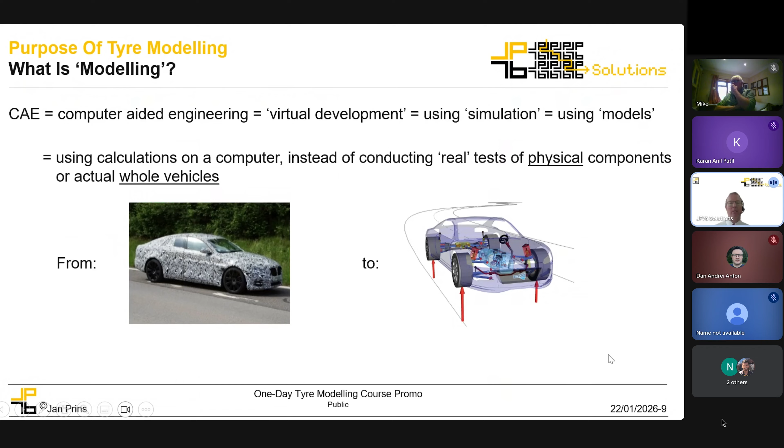We want to do that because physical tests are much more expensive. CAE is much cheaper. We will not need prototypes shipped all over the world. That costs a lot of money - you build a very expensive prototype and then you're sticking it in customs, on a plane for several days, stuck in a harbour somewhere. All those things are not ideal, and also physical testing is not particularly repeatable and reproducible, which CAE is.

If you want to do simulations of how vehicles behave dynamically, then of course tyres play a very important role in that. And if you want to do simulations of dynamic behavior, then of course you will need tyre models. They are then used to do development of vehicle dynamics attributes, durability, reliability or dependability as some people call it these days, and NVH - noise, vibration, and harshness.

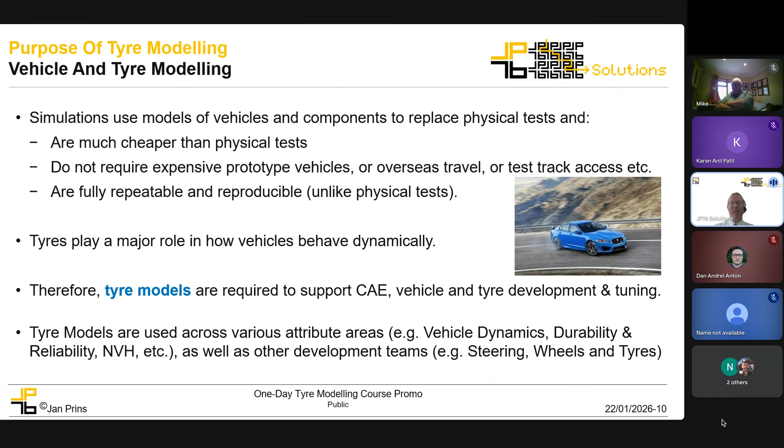And just more specialist areas such as the steering teams, the wheels and tyre teams, etc.

I'm not going to go into detail on this, but tyres do their stuff by virtue of friction, by virtue of grip between the tyre and the ground. There is no grip without slip, so you always have to generate a little bit of slip to generate the forces, either lateral or longitudinal, i.e. fore-aft or left to right. There'll be a lot more about that on the course, but even there we will barely be able to scratch the surface - pun intended - as it's a complicated topic, and there's a lot of research going on in this area, and you probably need several years to really dive into the depth of it.

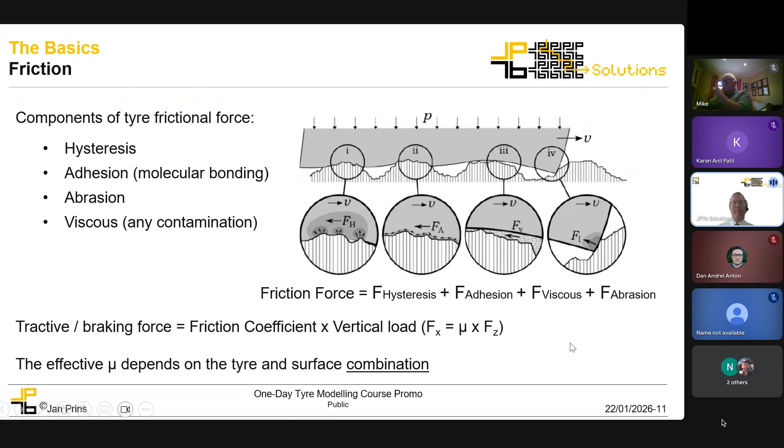My next slide is a bit more about introducing certain terminologies I already mentioned: lateral and longitudinal - longitudinal being fore-aft, lateral being side to side. But there's also terms such as camber, or inclination angle, so how much the wheel tilts, and slip angle, how much the tyre is pointing away from straight ahead. There'll be much more about this on the course, of course.

A friend of mine in the industry, Dr. Christian Bachmann from FKA in Germany, was recently quoted in Tyre Tech magazine, and he was saying: tyres combine mechanical complexity with highly non-linear behavior. I couldn't have said that better. Tyres are complicated, but it also makes them very interesting to work with.

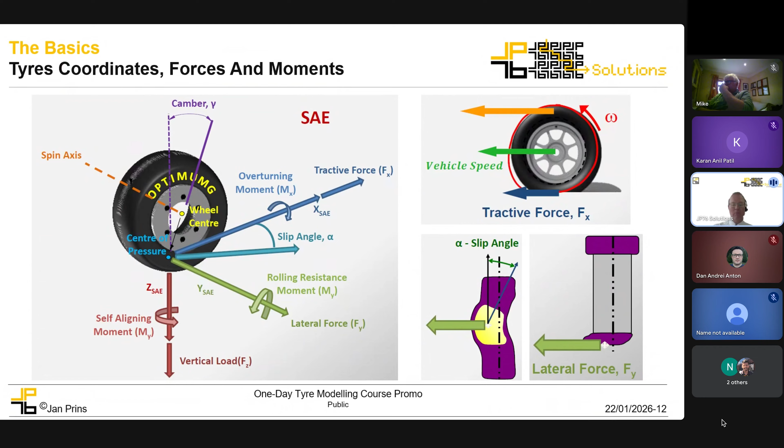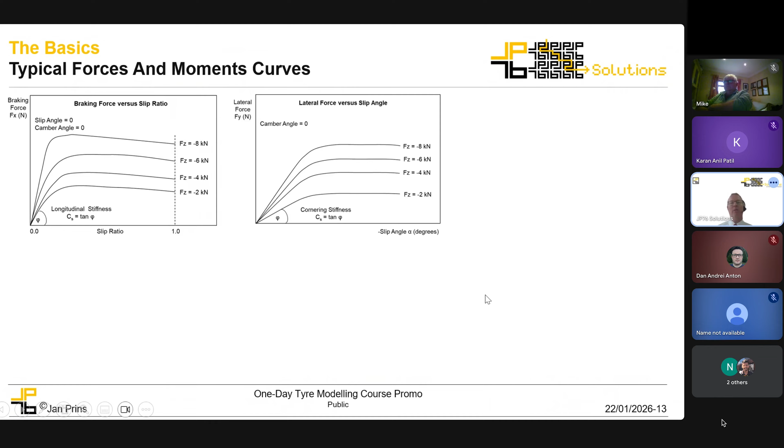Again, I'm not going to dwell on these various graphs, but these are typical graphs that you can produce if you test tyres and then plot the results that you get. These are typical ways of looking at the data you might gather for a particular tyre, or more often on several tyres, to compare those to each other. And tyre modeling is then about coming up with mathematical equations that, for the same input conditions as you had on your rig, produce the same forces and moments as you measured on the rig.

That's probably the shortest I can put the principles of tyre modeling. For magic formula models, which we will talk about a lot more on the course as well, the magic about that particular tyre model is that someone came up with some equations and they magically match the shapes of these various curves that you typically measure on a tyre.

For other models, the principle is still the same, but those types of models, such as FTire and CDTire, are models with physical properties such as stiffness, damping, grip, etc. But again, the principle is the same: you have a model, you give it the same conditions as in your measurements, your model then predicts some outputs, and you compare those with what you've measured, and you keep tweaking the parameters in your model until it matches what you've measured as closely as you can get it. Depending on what model you have, that can take a matter of hours, days, or even weeks.

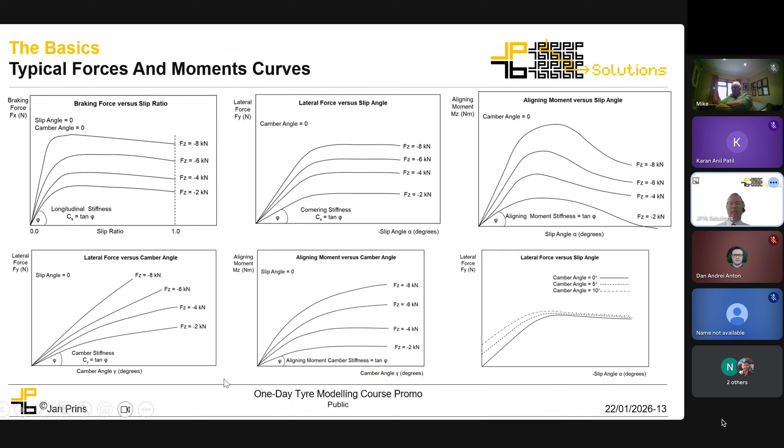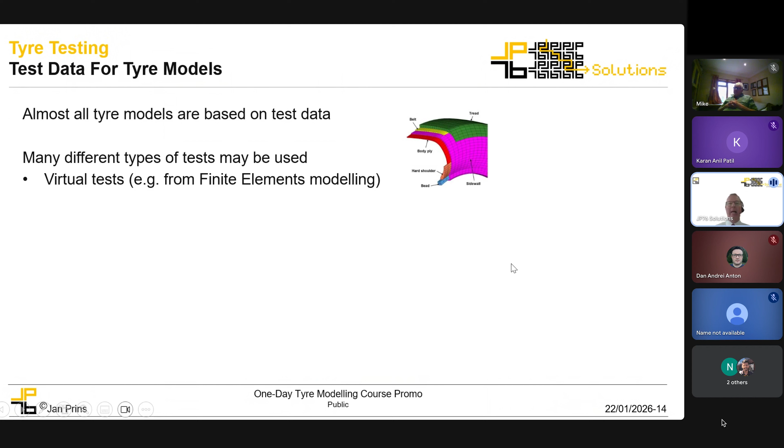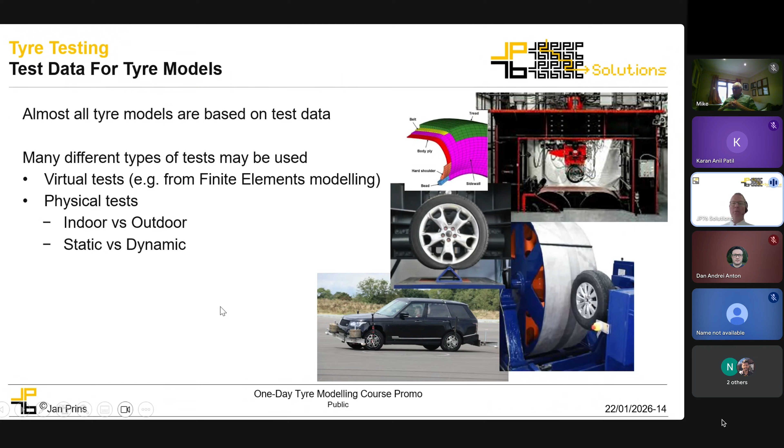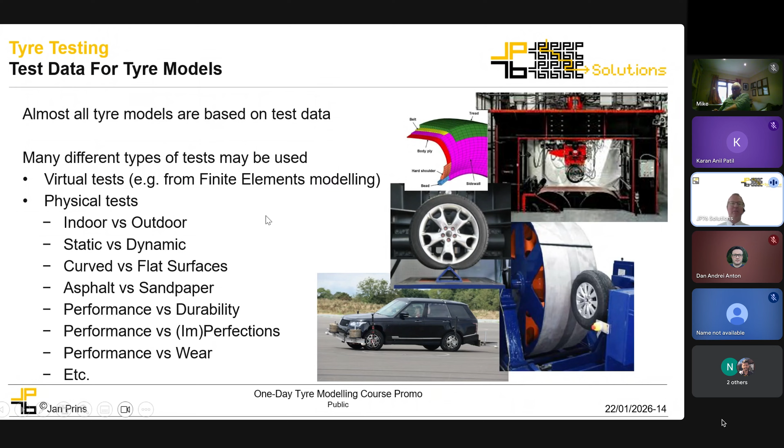So a static tyre is literally what it is. It's not rotating, it's just pushed down or pushed sideways or steered. You can have curved surfaces or flat surfaces. You can be looking at lots of different aspects of the tyre with regards to performance, durability, or performance versus any tyre imperfections, or how a tyre wears, etc.

But typically, empirical models would be looking at something like magic formula. Physical models would be looking at things like FTire and CDTire. And for FE models, we'll be looking at Abaqus or similar types of FE models for tyres. We would not normally use those in the sort of dynamic simulations, dynamic work that we typically are talking about here.

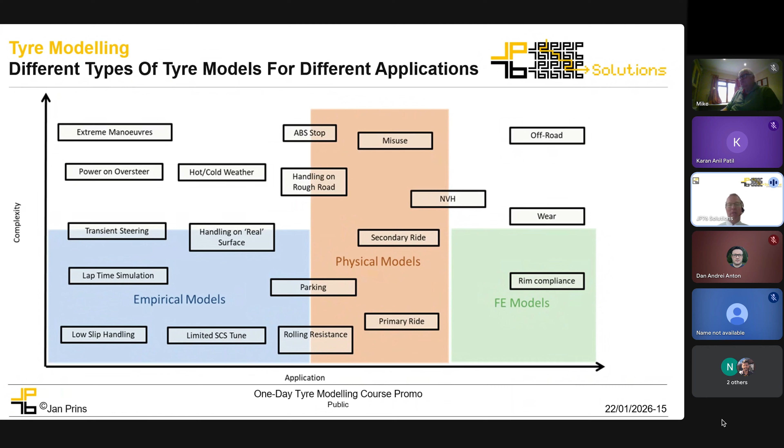So again, I put this on LinkedIn to try and prompt a bit of debate and get people's attention, basically. But the current process, as I've just described it, is very much: you make a tyre, you test it, you get some data, you create a model, and then you can do your simulations. But that's not ideal, because you'll already be making a tyre, which costs money and time, and it might not be the tyre that you need.

So really, the design process is creating a model first of a tyre. You have to, of course, be confident that you can make that tyre. But if that is the case, then really you want to do your selection of how the tyre should work and what it should do and how it should behave and everything else iteratively in CAE by using simulations, and only make the tyre once you are happy that it works with your vehicle model, it works with your vehicle design and all the other properties.

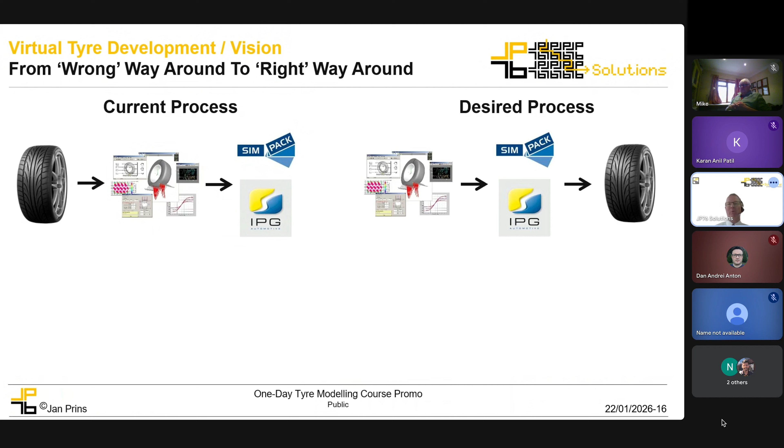And in this particular graph, I've put SimPack and IPG, but as I've already said, also on LinkedIn and earlier, other simulation packages are available, VI Grade, Adams, and others. And really, you want to optimize the tyres in the CAE and only then produce them. And really, you should try and get to the point where you can print a tyre.

But that process relies on two key capabilities that you need, two key things. You need capability, you need accurate CAE, you need accurate simulations, both for the tyre and for the rest of the vehicle, of course. And you need objective targets. Because if you want to do your development and your attribute tuning virtually, then you need to be able to do that offline.

Perhaps even doing some automated varying of various components and then working out which one gives you the best performance. Well, in that case, you need objective targets for that performance that you're interested in, unless you want to go to using driver simulators, but then you're putting the human back in the loop, and then you're getting the problem again of repeatability and reproducibility, different drivers giving different results, different drivers using different methods, and even the same driver perhaps not being always consistent.

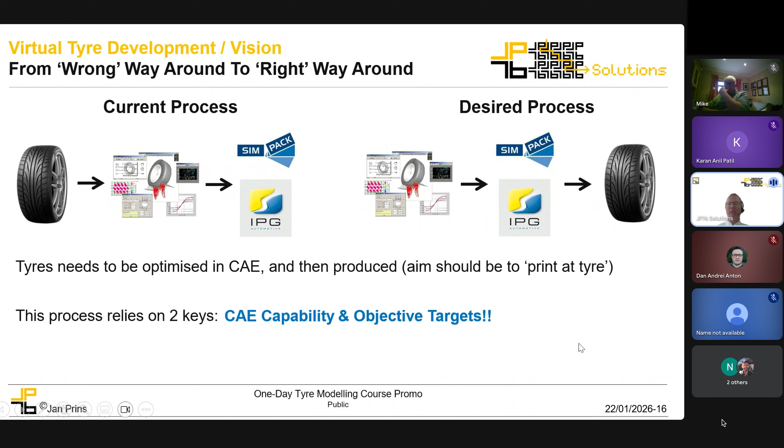So you really need to do things as objectively as possible. And that needs objective targets developing for a lot of things where there currently are no objective targets, at least not in the company I've worked for.

So the vision that I have and been advocating already in my previous job, but even still now when I get to advise people on how to do tyre modelling and how to go about it, you should really aim for having virtual tests for every physical test that you do in your vehicle development and your component development. To sign a vehicle off, to sign components off, there is an enormous amount of physical testing done on test rigs, on the roads, on test tracks, in labs, whatever. And ideally, you want to take stock of what all those tests are and see if you can develop virtual tests to replace those physical tests.

And then you can do your vehicle development and your attribute balancing virtually. You can do your sign-off virtually. And ideally, you wouldn't produce any physical prototypes till really, really much later in the vehicle program than is currently being done. And most people, when you get to that point, would not be able to tell that that physical prototype late in the program isn't quite there yet. Probably only very susceptible, very critical people will be able to tell that there's still a few percent to be gained by some tunable components or software parameters on the vehicle to get to the 100%. But you will be more or less nearly there. And I know that this vision is not realistic yet, but you need to have something to aim for.

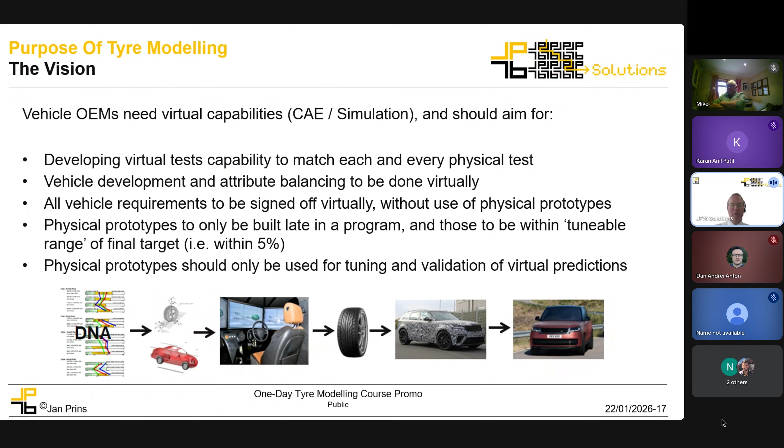And really, the physical prototypes that you eventually build should just be used to confirm what you've done. You should try to get to this stream of events: you have your targets, your DNA, what you're aiming to develop for a particular vehicle. You do your simulation work, and if possible, you'd also go to the driver simulator. Then you make tires, you make prototype vehicles, and then you go into production with your final configuration of everything that you were able to tune.

As I already said, it's an extract of a 5-day course as we used to run it previously between Mike and myself. If more than a 1-day course is of interest to you, please get in touch. Or if you can't spare a whole day to learn about tyre modelling and want something even more succinct, we can also look to develop that.